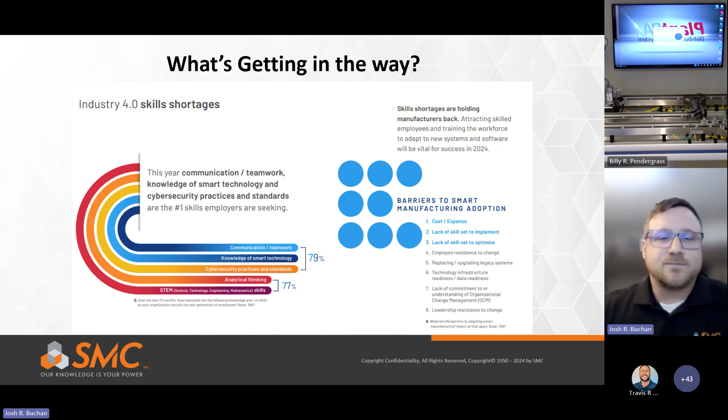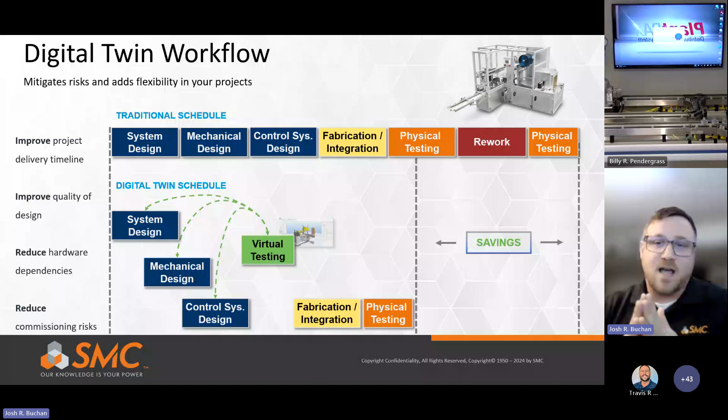The digital twin created by using Emulate3D mitigates the risks and adds flexibility to your projects. It helps improve your project timeline and the quality of the design while reducing hardware dependencies and commissioning risks. As you can see here, with a digital twin schedule compared to the traditional schedule, we test the system virtually while working on the system, mechanical, and control system designs. This allows us to cut out some time for physical testing and rework, leading to savings.

So some of the tools that we have here to implement this digital engineering in your operations would be, one, Emulate3D. Emulate3D will be used to add virtual commissioning and simulation to your digital design. FactoryTalk Echo is used to enable real-time data insights for improving decision making.

We'll not go much into detail on this, as we wanted to inform you more about the other solutions with our time today, but Echo is a great tool for emulating a PLC instead of relying on the physical PLC to grab this data. And FactoryTalk Design Studio Copilot will simplify and streamline your design workflow.

From here, I'd like to hand it off to Dan Racklyeft so he can talk a little bit about Emulate3D for you.

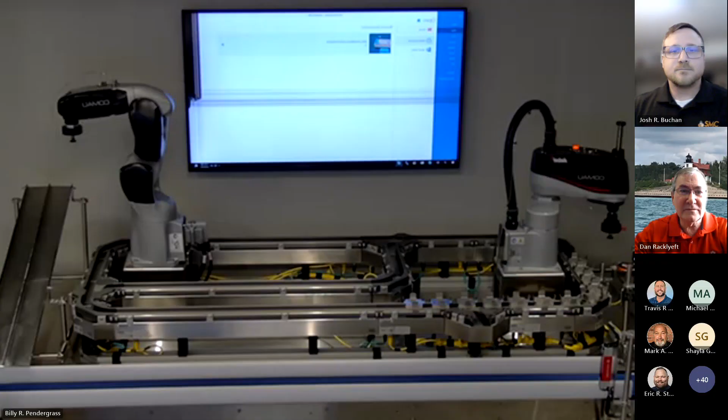Dan, you're on mute. I apologize. There we go.

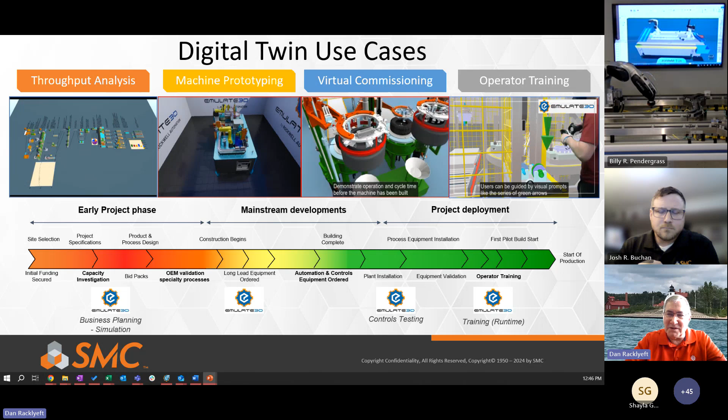Or even operator training—imagine having an operator already trained on the equipment before that equipment is even started up. The whole goal is to speed that time to value. Digital engineering helps accelerate that design environment. Virtual commissioning helps you shorten and accelerate, moving your commissioning off the critical path, and even training operators ahead of time is all key.

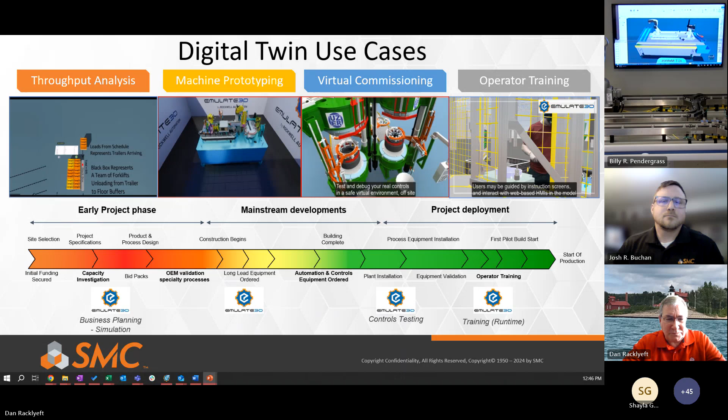So what does the software look like? Emulate3D really is one aspect of Rockwell's digital ecosystem. It's an environment that's self-contained—we have catalogs of items that you can build, which I'll show in the next slide. But you can also build on that. So being a great product out of the box, there are also ways to expand its use.

We have customers that use it strictly for demonstration purposes, all the way up through virtual training cells. Emulate3D is that product that, as we talked about, has VR and AR for training. You can expand the fidelity of a model and actually go from simulation to emulation. Simulation, to us, is when all the behaviors inside the model are self-contained—things are moving around, acting and reacting just based upon logic inside the model itself.

From an emulation standpoint, we just have a piece of digital equipment, and that equipment sits there, just like real equipment on the plant floor, until it receives outputs from a PLC, and then generates inputs to the PLC, and then the PLC does the logic to make it work. So you can take your PLC program, download it into a physical PLC, or use FactoryTalk Logix Echo, which is an emulated PLC, to drive that digital twin, that digital replica, all in the safety and comfort of sitting at your desk while you're doing that debug.

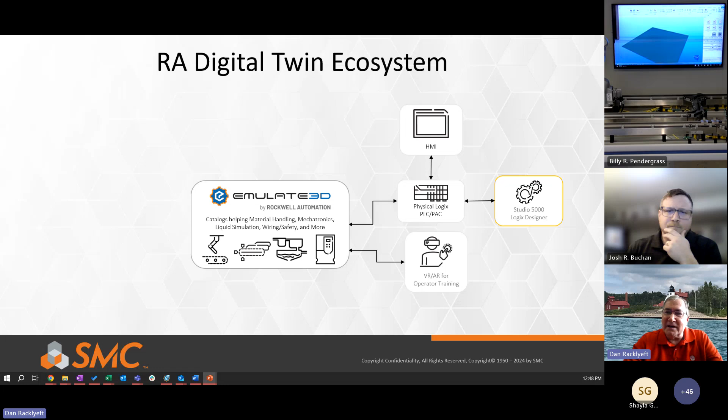We have catalog items, but you can also enhance that model by bringing in your own geometry. So once your mechanical folks have done their digital transformation and thrown that data into the digital thread, Emulate3D can receive that digital data, and you can bring in that geometry and add the kinematics to it. That's how you get that visualization of a kinematic model moving and acting.

In addition, if I'm going to be doing true virtual validation, I need to validate that my schematics are correct, my wiring is correct, my push button panels are correct. So it's not just validating your PLC program and your HMI program, but also your schematics, to make sure everything is connected correctly.

Again, it's not just the mechanics of the equipment moving, your robots and your operators and your tooling and your conveyors, but also the product itself. So you can see that product moving down through the line.

Emulate3D is really focused on discrete manufacturing within the four walls of a plant, and for those discrete processes we have equipment. But the software is expandable. If you have other types of processes, like free-flowing liquids or gases, you can continue to expand the fidelity of your model through our functional mock-up interface. So we support FMI, and we'll have that in the next month with the new release coming out. And if you have a process model in MapleSim, MATLAB, or ANSYS, you can incorporate a reduced order physics of that model and apply it inside Emulate3D.

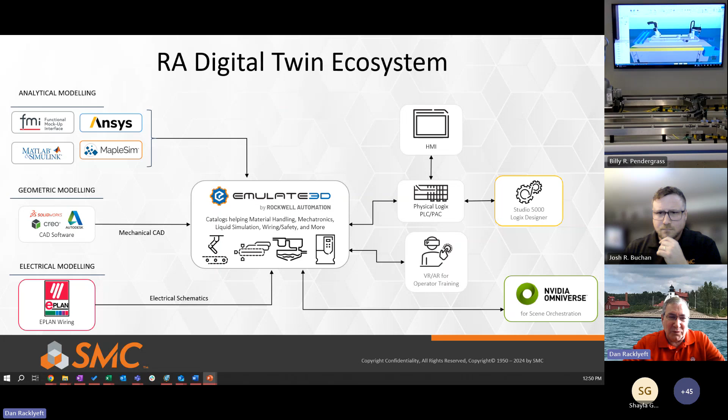And if you really want to expand that, we have connectors to Omniverse. If you want to do total scene orchestration, and if you're familiar with NVIDIA's Omniverse, it's a really nice collaborative 3D rendered environment for digital equipment. We support that either through live connections or even post-processing with Emulate3D files.

So Emulate3D really can help you through that whole design cycle, even from sales, from a demonstration standpoint. We talked about simulation, being able to have a physics-based simulation engine, which is key. It doesn't have to be physics-based, but if you want that higher fidelity, you can. The beauty of having physics-based simulation is that in most discrete event simulation engines, the visualization is really just a graphical representation of the empirical data.

But in Emulate3D, an object moves from point A to point B because that conveyor has an acceleration, a max speed, and a deceleration. If I stretch that conveyor, it's automatically going to take longer, if I maintain the same speed, for that product to get from point A to point B. So it's a very nice 3D environment where you can lay items out and then use that data from the physics of the environment in your simulation.

And then we've talked about virtual commissioning. What does it look like a little bit from the product side? We'll just touch on it here, but by all means we can certainly deep dive into more detailed conversations and product review. Just reach out to your local distributor, and we'd be happy to set that up.

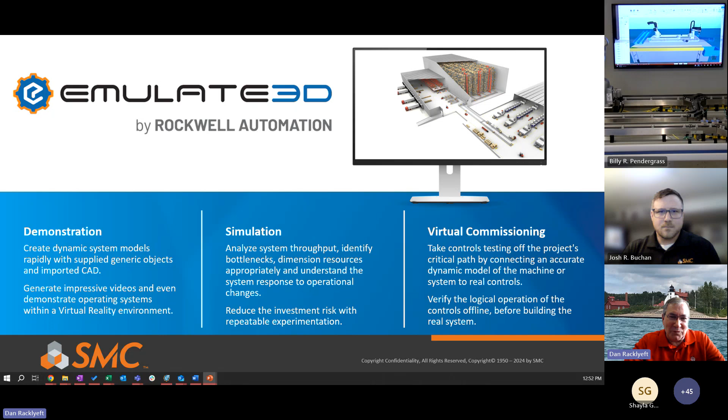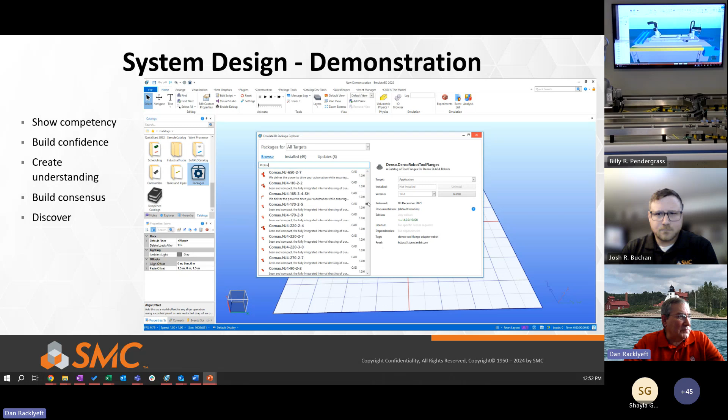But the system itself, from a system design standpoint, the ability to drag and drop is key. We have an online library of catalogs with robots, AGVs, ASRS systems, and AMRs. The whole point is to be able to quickly lay out and demonstrate a process without having to write a lot of code.

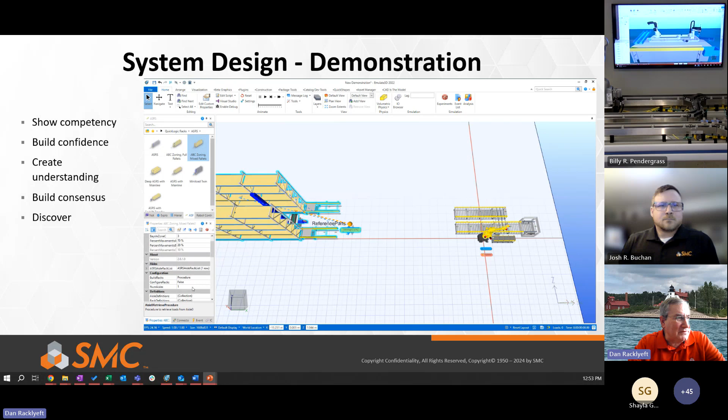In this case, this video is sped up a little bit, but you can see that we're not creating code anywhere. It's drag and drop, cut and paste of predefined catalog items. Those catalog items have the visual here, but they also have the behavior built in, as we talked about from a simulation environment standpoint. So on a conveyor, you can just say that it's going to turn on and run.

If the conveyor has a photo eye attached, you're going to say, hey, you're going to run until my part hits the photo eye, and then you're going to stop.

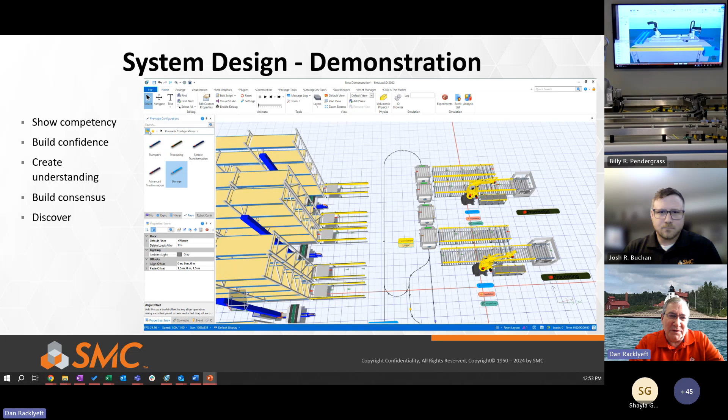So it's a very easy way to put a concept together and to share that concept either with internal stakeholders, so your mechanical folks, your process folks, your controls folks, your maintenance, your operators, but also with customers, right? If you want to share a concept with a customer, being able to share that in that 3D environment. And there's a lot of things that you can catch, shall we say, and see in that environment.

We actually had a funny story. A plant manager, customer was showing their layout to the customer, and they actually went to the detail and added the plant layout and the plant floor as a DWG on the bottom of this. And the plant manager was not happy because he had a conveyor running right across the window of his office that was on the second floor. So again, having that 3D environment just brings that clarity to the whole operation.

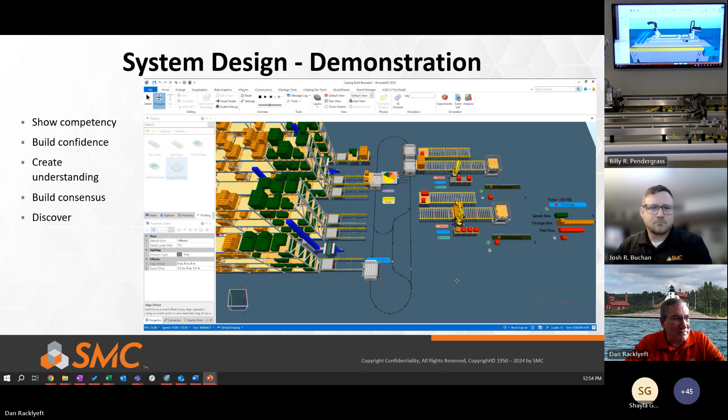From an optimization standpoint, that's where you can really bring in the Sim3D level that allows you to run experiments, take a look at where you might have bottlenecks. We talked about any level of fidelity visually. This is an example here. We don't know what the tooling looks like yet, but we're just laying out the process and we're optimizing the process. So we have catalogs of black boxes that in this case, we just have different processes, different buffers, different process times, and you can run all kinds of scenarios there.

If you want, then you could slowly replace this buffer with what a conveyor buffer would look like, and you can mix and match black boxes with higher fidelity graphics as to what the equipment might look like as you go through that. So imagine the ability to verify your OEE, right?

Improve that quality the first time, reduce the unplanned downtime, right? You can build in here, if you have empirical data with your MTBF and MTTR data, mean time between failures, you can put that in here just to see what the total throughput would be. And then you can try different scenarios, right? Well, what happens if I run a parallel line here? Is that going to get me the throughput that I need? Is that where my bottleneck really is? Do I need more testing stations? So the ability to drive those improvements.

The nice thing is, for new systems, you can do this ahead of time, but you can actually use the software to model existing systems, and then apply all your what-if scenarios and see which of your scenarios are going to get you better throughput for equipment that you may already have on the floor. So you can see here, this is the same dashboard you can have, but really more from a physical environment if you want to see that.

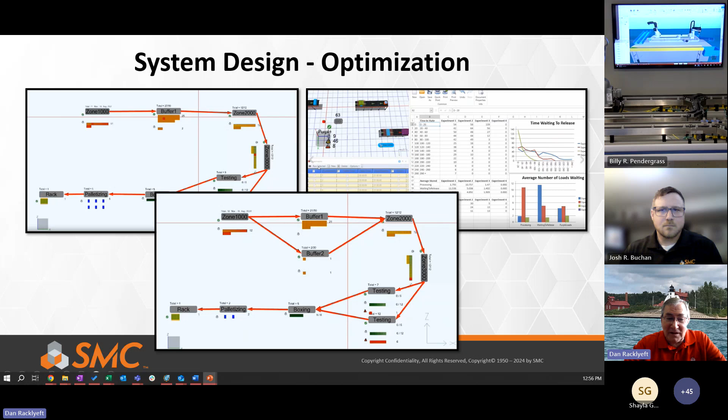And then our other aspect we talked about was virtual commissioning, and just imagine the ability to have your PLC program either in a live PLC, a physical PLC, or in this case, a virtual PLC with FactoryTalk Logix Echo, but the ability to, again, drive that model, validate your PLC code, validate that all the mechanics are going to work together. Imagine doing this ahead of time, right?

I started my career as an old controls engineer and spent lots of time in plants, waiting for skilled trade operators to help me if I just needed to move a limit switch a little ways to see if it was going to operate properly. Here, it's a 3D environment, right? I can move the switch, make sure that that's what's going to work. And the technology today is at the point where it is the physical equipment, it is the physical robot, or physical replica, shall we say, of that robot, graphically and mechanically correct, kinematically correct.

We had an owner of a company that was just ecstatic because his controls engineers were able to be home over the holiday because they were able to start up, or commission a line, a lot faster in the real world because they had done it virtually ahead of time.

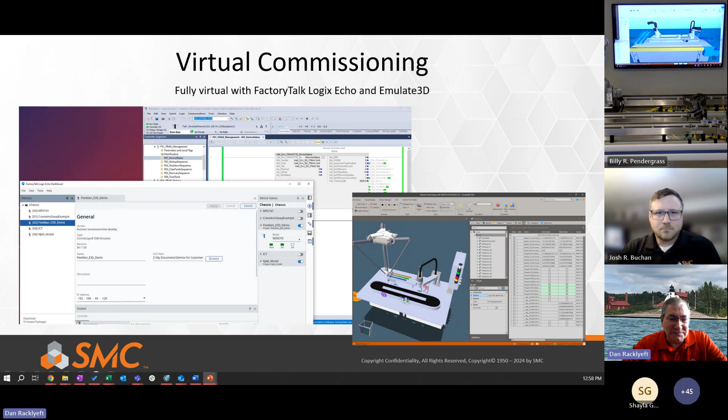The ability to do it in that safer environment. So we have that model. Imagine really using that for operator training, either in a fully immersive environment, in the case of virtual reality.

Or the ability to actually do that just in the 2D environment. I say 2D environment, but it's really a 3D model inside a 2D environment. We have the ability to record videos, so you can imagine recording a video and training an operator.

This is the actual HMI virtually displayed in the model, and again fully emulated with all the schematics, hitting your e-stops, making sure everything's going to work, doing your safety buy-offs ahead of time in a much safer environment.

That's really what I'll leave you with. The ability to have that digital replica of your actual tooling, and imagine having that with you on your desktop, and being able to remote troubleshoot, do deeper dives of troubleshooting.

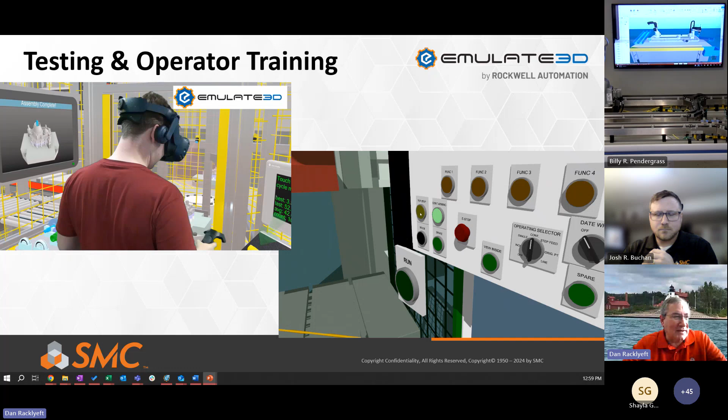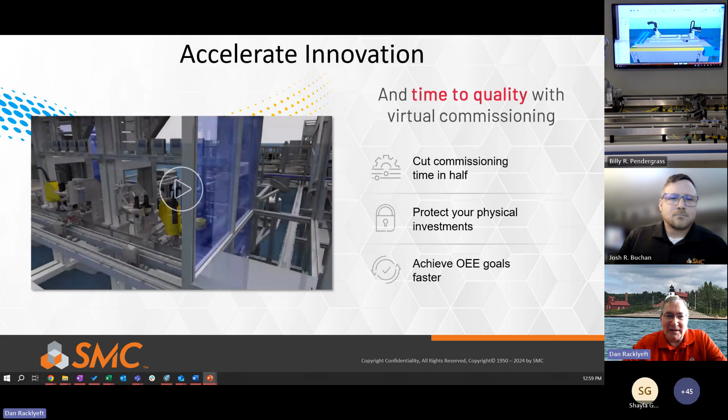So it really is the ability to accelerate that time to value. In this case, this is the actual contactor line that Rockwell moved into their offices in Milwaukee, and they built a full model of that line just to verify the process, verify that it was going to fit in the location, verify that all the options could properly take place, and verify all the controls debug.

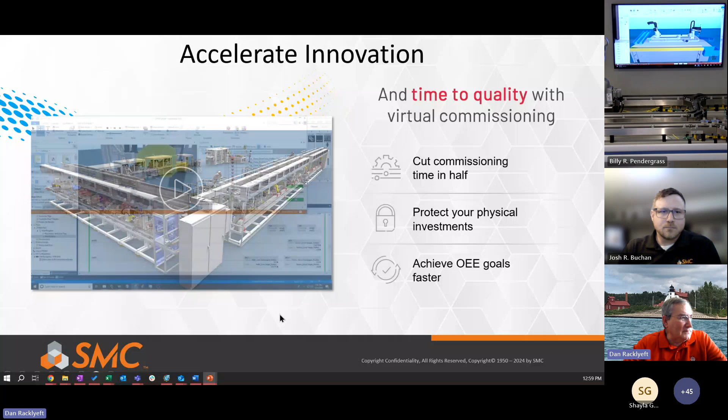They debugged all that ahead of time so that the line started up really quickly. So you can see that having that digital machine in that collaborative environment can be key to accelerating time to value. And of course, none of this would be possible without digital transformation, without digital threads of the data being there, without the digital equipment. So that's really, to sum up, the value of what digital engineering gives us.

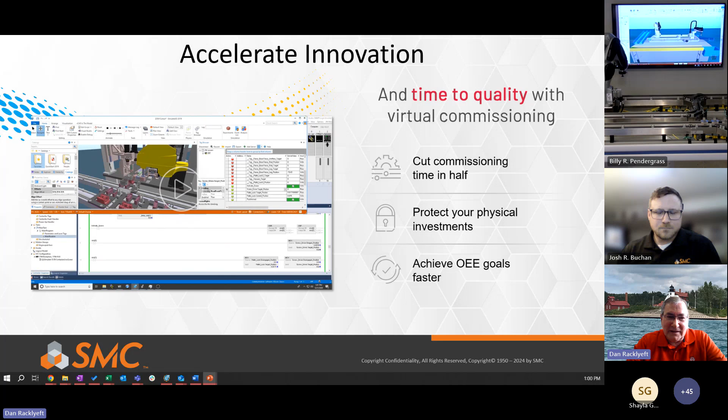Thanks, Dan. As you guys can see here, Emulate3D plays a huge role in the digital engineering, it's the backbone of that digital engineering solution from us here. Next, I'd like to hand it off to Shayla George to talk about how we can make it easier on our customers with Factory Talk Design Studio and Copilot.

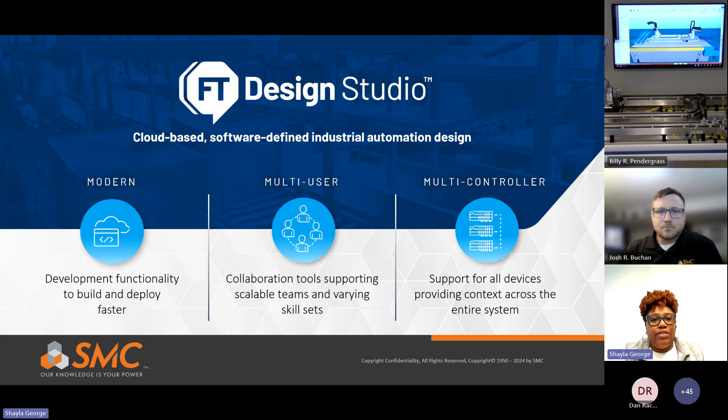So those are the 3 M's that we use to describe Factory Talk Design Studio: modern, multi-user, and multi-controller.

So before we jump into the most recent updates, I just wanted to give you a quick look at what the roadmap looks like. As I mentioned, the exciting part about the SaaS-based products is that we have the ability to update frequently and more often, and you always have access to the latest and greatest version of Design Studio without having to manage this.

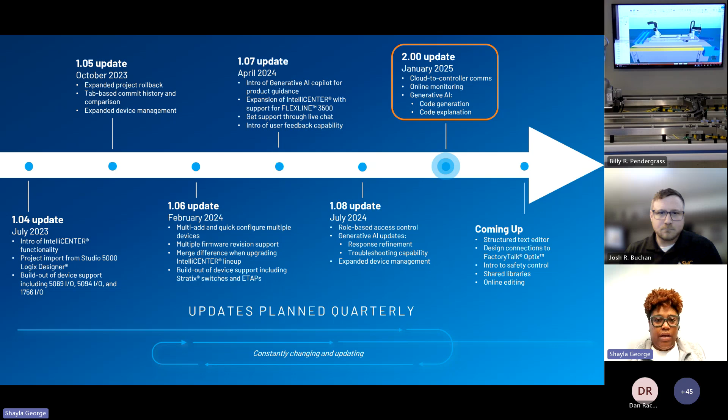So now we will jump into the 2.0 updates. As I mentioned, 2.0 was released in January, last month, and it was a big release for the Factory Talk Design Studio program. What you'll see here on this slide is that we have delivered AI-powered design that can generate, explain, and troubleshoot code using simple natural language prompts.

We also have the ability to deliver technology through a secure connection from cloud to controller communications. Previously with Design Studio, once you developed the application, you'd have to convert it to an ACD file and open Studio 5000 Logix Designer to download that file to the controller. But with version 2.0 of Design Studio, we now have the capability of going directly from the cloud to the controller, and we'll talk a bit about how that's done.

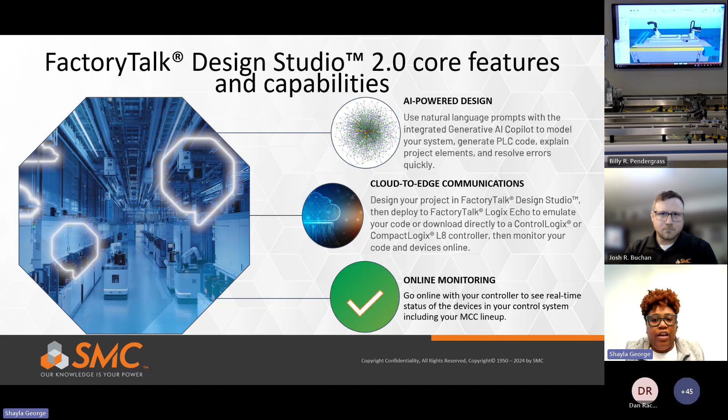With the 2.0 release, we've also enabled the end-to-end workflow of being able to design, deploy, and do online monitoring of devices in your automation system.

First we'll talk about Design Studio Copilot and the integration of Copilot. The use of natural language prompts with the integration of generative AI has enabled product guidance, project guidance, as well as project creation.

With product guidance, this gives the ability to accelerate onboarding by guiding new users through product features without external help, and simplifies troubleshooting by helping users understand and resolve errors quickly. It uses Copilot to generate responses from the online help as well as error code documentation, so users can ask things like what new features are available, what devices are supported, or how to create a routine, and Copilot will generate a response to those questions.

With project guidance, this enhances system understanding by delivering project insights in a no-code environment, eliminating the need to navigate complex logic programming. This gives customers the ability to get an understanding of what's going on in a project.

Customers dealing with legacy PLC code, as well as those new to PLC programming, can benefit greatly from this because Copilot has the ability to explain complex programming logic and give a summary of different pieces of the code inside Design Studio Copilot.

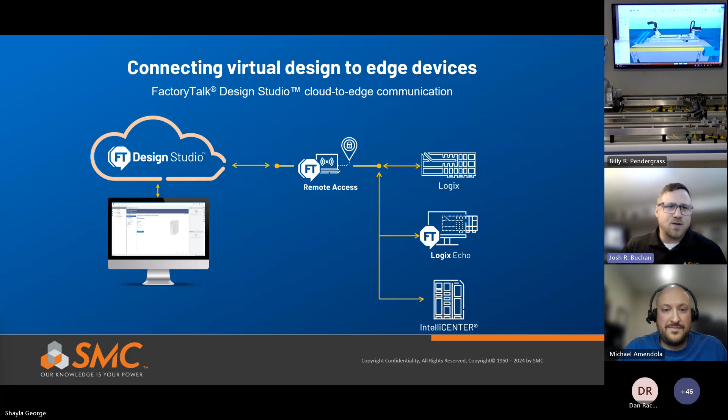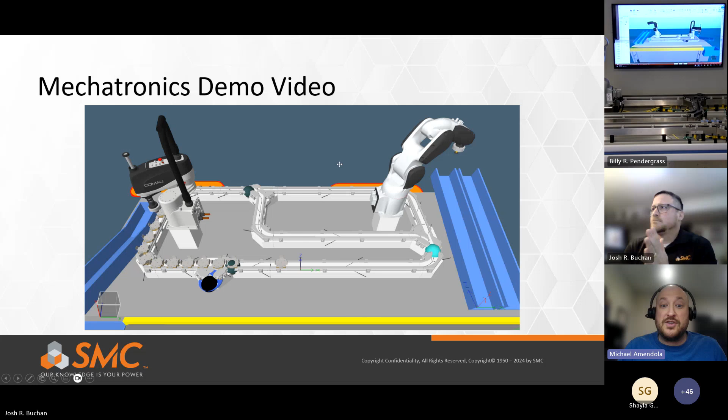Next, I want to show how SMC and Rockwell collaborated to get ahead of the curve here. So I'm going to give it over to Mike Amendola to talk about our demo video that showcases what we've done there. Thanks, Josh. My name is Mike Amendola, I'm a mechatronics technology consultant with Rockwell, and I want to show this demo here. This is a mechatronics demo showcase that we have.

SMC had decided they wanted to develop some kind of mechatronics demo to showcase the capabilities that SMC and Rockwell have with our unified robotic control and our independent cart technology, the foundations of mechatronics that we have at Rockwell. What you're seeing in this video are two Comau robots utilizing our unified robotic control, meaning we can take those robots and control them with Rockwell PLCs and Rockwell Kinetix servo drives.

So you don't need a separate robot controller, and you don't need knowledge of how to program robots in particular. You just need a foundation of ladder logic in order to do this. You also see our MagneMover LITE intelligent conveyance system, part of our independent cart portfolio, which allows for intelligent conveyance through linear motion with magnetics and linear servo motors.

So SMC came to Rockwell, came to myself, and said we would like to build this demo to have in our new office in Springfield, Missouri. So we utilized these digital engineering tools. We used Emulate3D to import the CAD, import the robots, design the track, lay it out, verify, and do all of the verification that this demo was going to meet the needs of what we wanted to showcase, being able to show all of the important functions and features of Emulate3D and of the robotics and mechatronics.

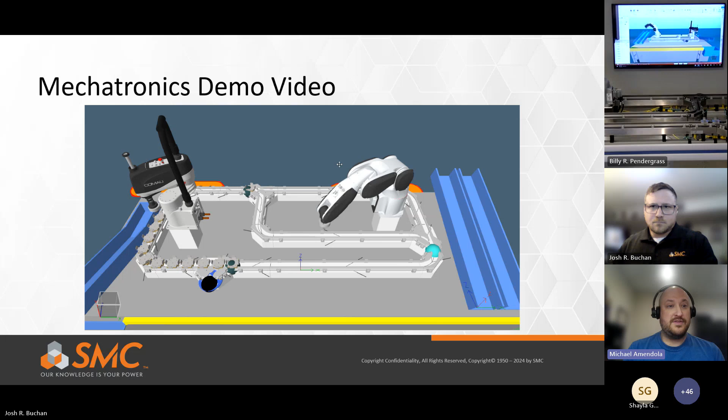Once all of that was complete, we went and built the demo that is now located in Springfield, Missouri. Josh, if you want to stop sharing, we could take a look and see the actual demo running live right now on a camera from Springfield, Missouri. So this is the demo that you were just looking at within Emulate3D, within that video, and this is the live version of that demo.

So we took the digital twin and we created a physical twin. You'll see we have the two Comau robots there running on unified robotic control, meaning they have a Rockwell PLC running them, the same Rockwell PLC that runs the rest of the system, and they are running with the Kinetix servo drives. You'll see our MagneMover LITE, our independent cart technology down there, as the pucks are getting sorted.

Those hockey pucks are getting sorted between the red and the blue, or the blue and the white. The robots are picking and placing and recirculating them around. And if you look behind there, you'll see the TV screen that has the digital twin also showing, running in synchronicity with the physical twin.